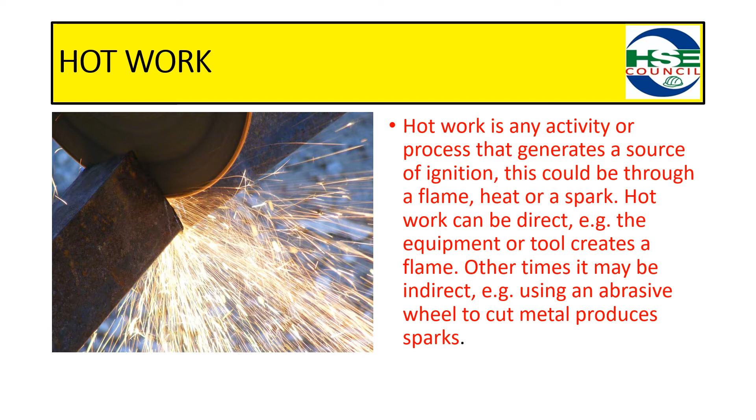Hot work is any activity or process that generates a source of ignition. This could be a flame, heat, or a spark. That is called hot work.

So, what are the precautions we need before we start the hot work?

First one, does the team member have training and experience? Without an experienced or trained person doing the hot work, that means grinding, welding, that type of serious work, that means risk hazard - there are chances of accident.

Next main point is whether the team members are briefed on the task and associated hazards. That means before starting the work, we explain to the team members about what is the work, and what are the hazards involved in that work. We need to explain to them.

So normally we know that the next point is sufficient PPE. Before starting the work, everybody knows the general PPEs, that means safety shoe, helmet, everything. But in this hot work, we need separate PPEs required, that means leather gloves, apron, face shield, full body harness.

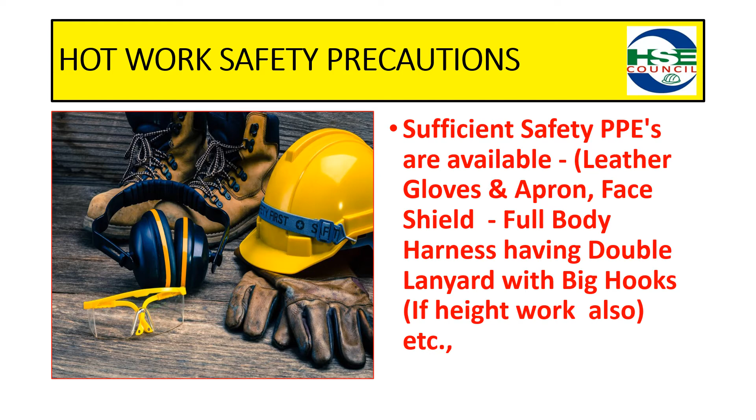One of the other main important points is, whenever the hot work is happening, the surrounding area - all flammable materials should be removed from that hot work area. Whenever the hot work is going on in a particular area, where the spark or flame will go we don't know, so we need to remove all flammable materials from that area.

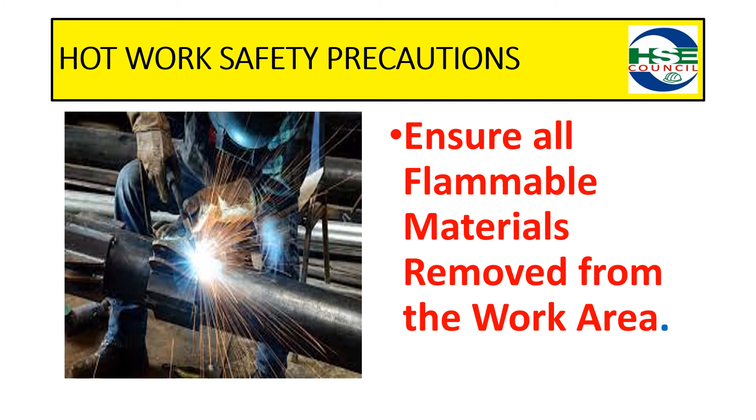Another main point is we are using the welding machine, gas cutting machine, everything. But before starting, we need to inspect all the machinery, and a safety inspection tag needs to be confirmed, inspected by a competent person before starting the work.

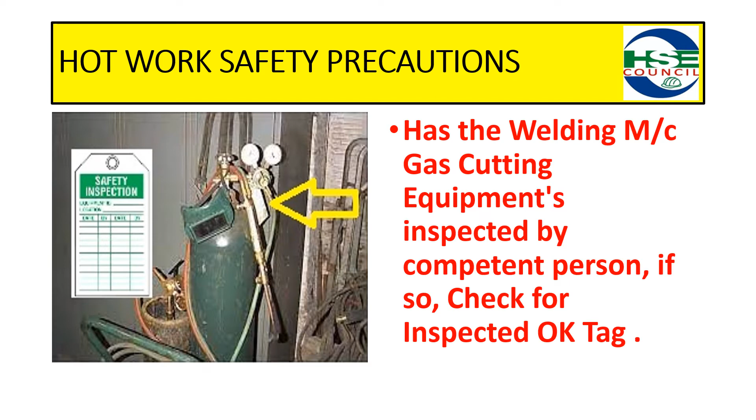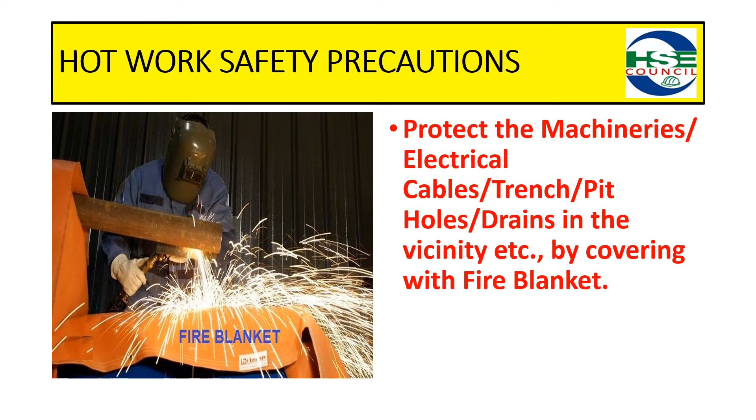Some areas need to protect the machinery and electrical cables, because our welding work or cutting work, gas cutting work, is happening in a normal running factory. So at that time we need to protect our materials or flammable materials, so we need to use a fire blanket.

One important point is the hot work area must be well barricaded and isolated. What is the purpose of barricading? Barricading is for the purpose of restricting or protecting against unauthorized entry into that area. So we need to barricade it before the hot work.

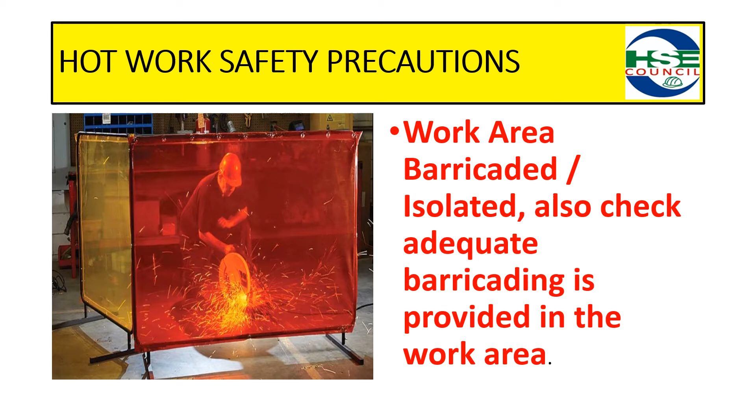And a fire watchman must be present at every hot work area, because that worker is concentrating on his work. At that time, where the flame or spark is going, he doesn't know, he is only focusing on the work. So at that time a particular person needs to do fire watching, and he should be well experienced to operate the fire extinguisher and fire sprinkler system.

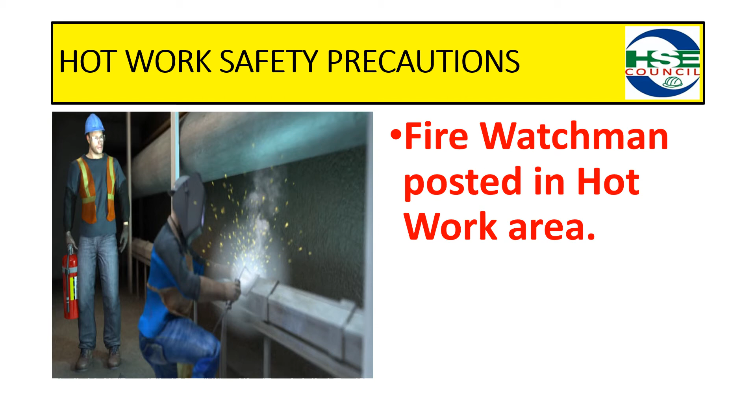Another important point is proper ventilation and lighting should be provided, especially in a confined space. So what is the purpose of ventilation? At the time of welding,

the fumes generate some toxic gas. It may cause an accident or injuries to the health of that worker. So we need proper ventilation. Some factory areas have no proper ventilation, so at that time they use exhaust fans to suck the smoke out from that particular point.

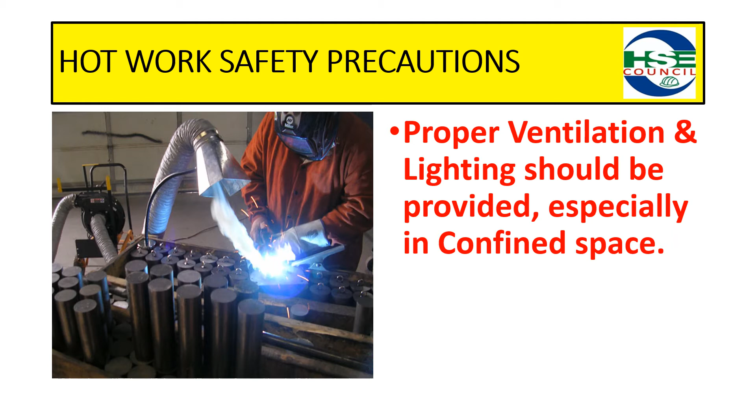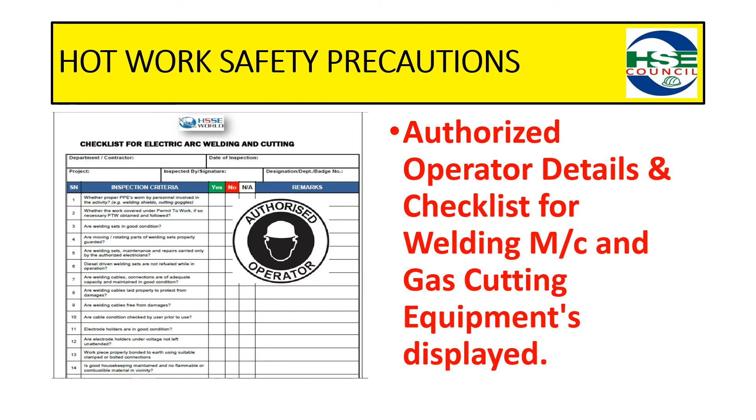Before starting hot work, we need the permit system. It's important to complete the permit system and identify the main operator of that work, whether welding machine or gas cutting equipment—everything needs an authorized operator. We also provide emergency phone numbers displayed in some of the hot work areas.

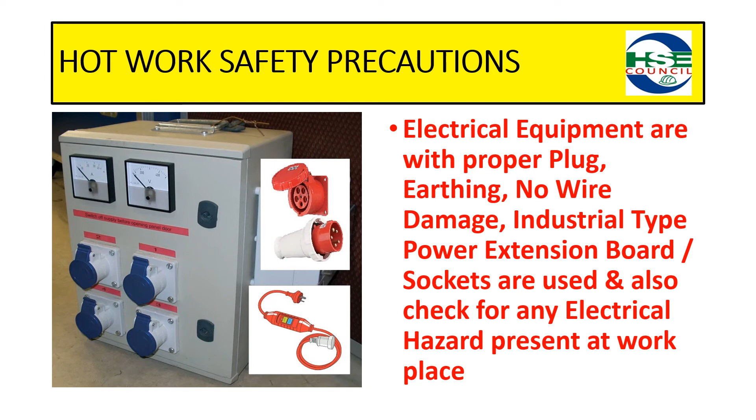One main important point is we should only use electrical equipment with proper industrial plug and earthing. Industrial plug and socket must be used; otherwise the current flow will be high, and the cable, socket, or plug may get damaged, which can cause fire. We need only industrial plug tops or industrial sockets—this is compulsory to follow and must be ensured before starting the work.

Another important point is that the gas cutting set, flashback arrestor, hoses, and welding cable must be in good condition. The safety officer must check before starting work that the flashback arrestor and gas hoses are all in good condition.

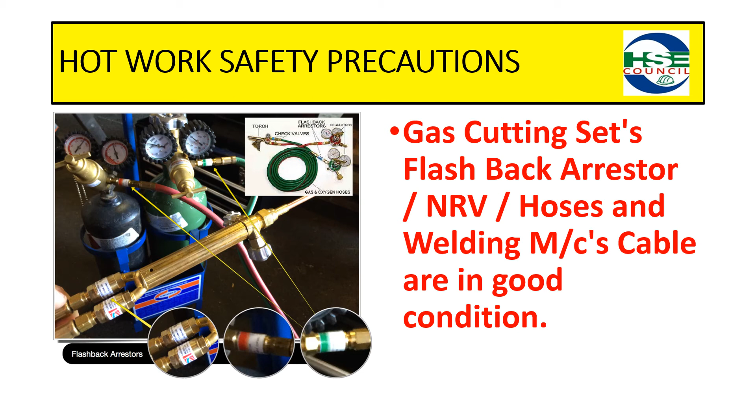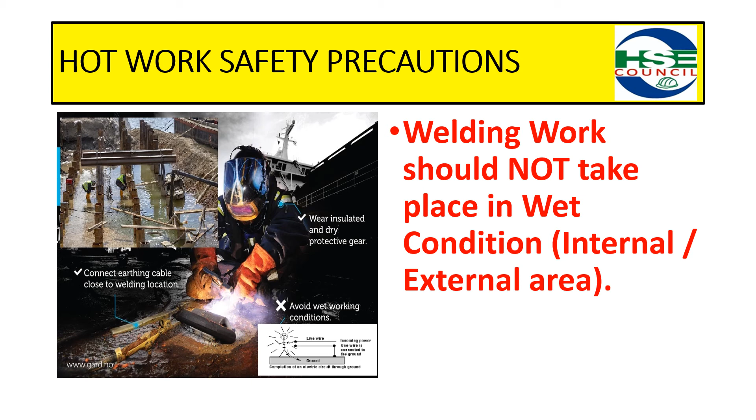Next important point: wet conditions should not be allowed. Arc welding in wet conditions should not be allowed, whether internally or externally, as there may be chances of electrical hazards.

Before starting the work, we must arrange proper fire extinguishers and sand buckets. The sand bucket should not be kept on the floor, and it should always be maintained without water—loose soil must be provided, and it needs to be protected from wet weather.

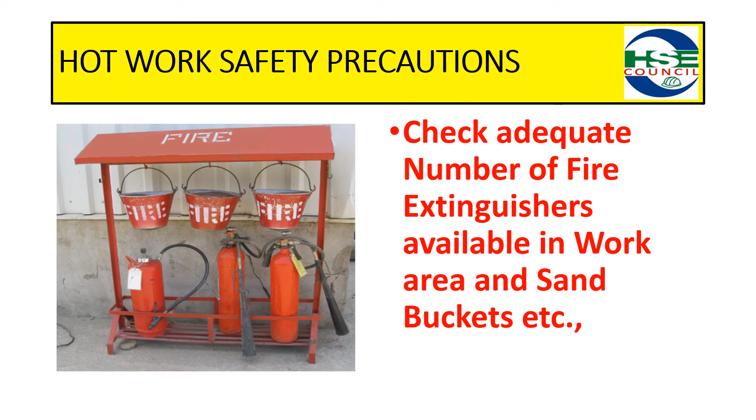During gas cutting, the gas pressure and gauge need to be checked to ensure the pressure gauges are in good condition. No grease or oil should be applied on the gauge thread, and the cylinder protection cap must be ensured. Oil or grease can cause variation issues, make tightening difficult, and may lead to gas leakage.

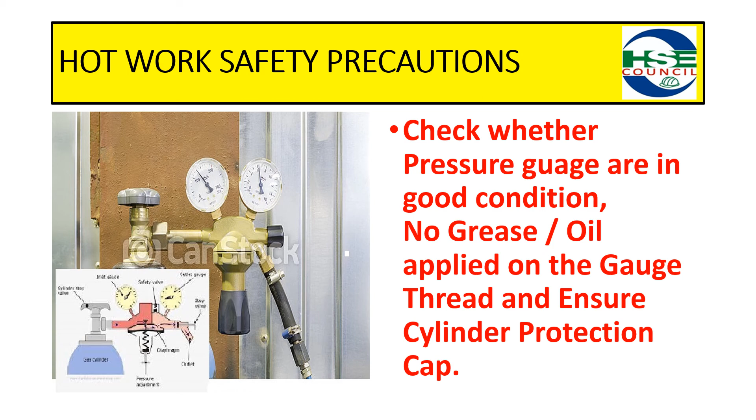Gas cylinders must always be stored in an upright position and maintained using a trolley, because if a gas cylinder is laid on the ground and there is a leakage, the cylinder may move with force depending on the leak. So it should always be maintained with a trolley—this is also a plus point because it's easy to move.

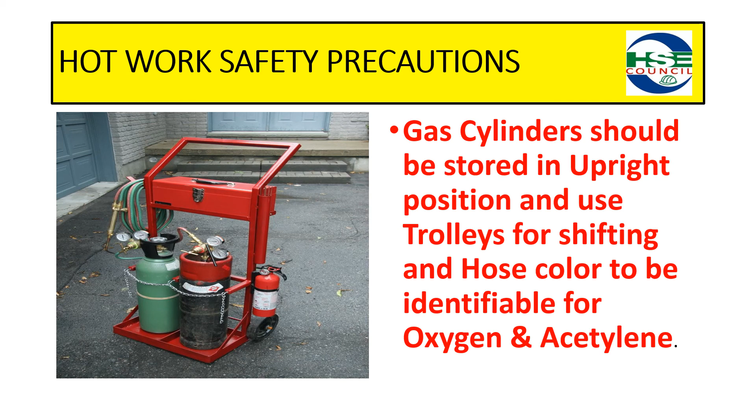Before starting the work, we need to display a signboard or caution board where the work is going on, indicating that hot work is in progress and that nobody should enter the area. This type of signboard needs to be displayed, along with the work permit, at the work area—because the work permit means concerned persons have approved the work, and only then should it start.

Another important point: without an engineer, supervisor, job leader, or safety officer present, hot work should not be allowed in any area. One of these—engineer, supervisor, job leader, or safety officer—must be present at the site.

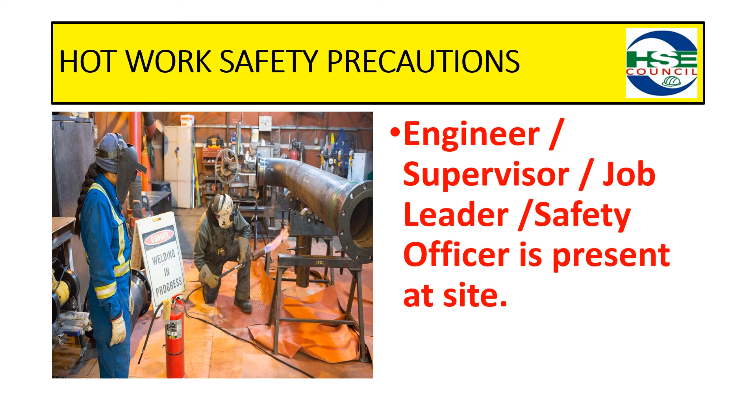These are the basic safety precautions of hot work. Thank you.